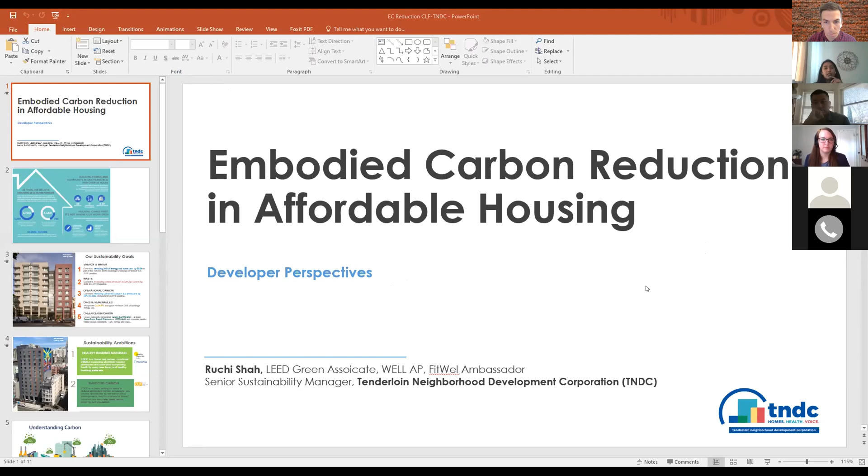So let me quickly share my screen. Does it look good? Yeah, we can see it. Looks good. Is it in full screen mode, or do you need me to switch? Not yet, if you can put it in full screen mode, that'd be great. It's for some reason stuck. Are you able to see the notes, or is my screen frozen? Okay, let me see. I can share the slides from my computer then. That would be great. Sorry about the delay, I think no presentation is fun without some technical challenges. That's right. Okay, can you see the screen now?

Awesome, thank you, Vaslav. So as Vaslav mentioned, I lead sustainability efforts at TNDC, and our main goal is to sort of understand how can we push our efforts in sustainability beyond what we hear, people reducing energy, water, waste. So Vaslav, if you can jump to the next slide.

A little bit before I dive into our perspectives about TNDC - we are an affordable housing owner and developer in San Francisco, and we have 43 buildings. This is a little outdated, the graphic, and 11 more in new construction. When we look at the full portfolio, this means that we have a huge opportunity to reduce carbon, which is sort of our biggest enemy right now as we are facing climate change issues all across.

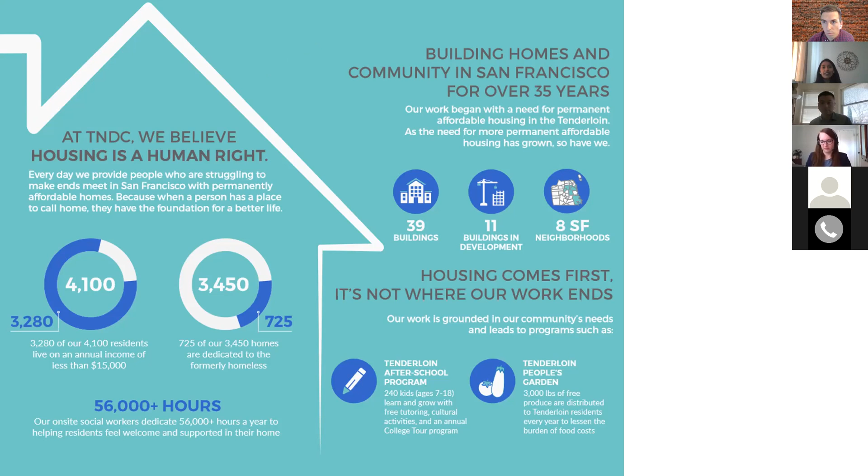So as I mentioned, we, like other developers, have standard goals on energy and water reduction and waste reduction, which directly impacts our triple bottom line and our tenants' bottom line as well. But with the changing environment around us, we really wanted to focus on carbon and adopt a very specific lens on how we can reduce carbon.

So we started with an operational carbon goal, which means reducing carbon emissions from our building operations, meaning gas and electricity usage. Our goal is to reduce scope 1 and scope 2 emissions. We also decided to focus more strategically on on-site renewables, so every new building that we build is evaluated for solar PV.

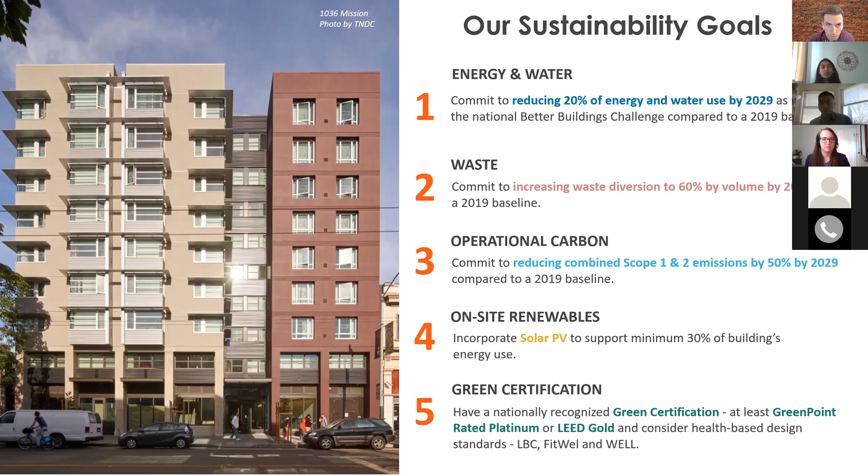And then targeting green certifications, irrespective of whether a funder requires us to do that or not. When we look at LEED, we want to hit gold. When we look at GreenPoint Rated, we want to hit the maximum levels feasible within the constraints of our budget. And on a per-project basis, we are looking at Living Building Challenge, Fitwel, depending on how it fits with the type of project.

Furthermore, we have two ambitions. We do not yet have a formal goal, and we are still researching how to make it a goal, but we really want to reduce the use of toxic chemicals in our buildings. Because if you think about it, the population we are serving already has a lot of health concerns and is vulnerable to climate change impacts. So our goal is to reduce the toxic chemicals used in building materials right from the onset.

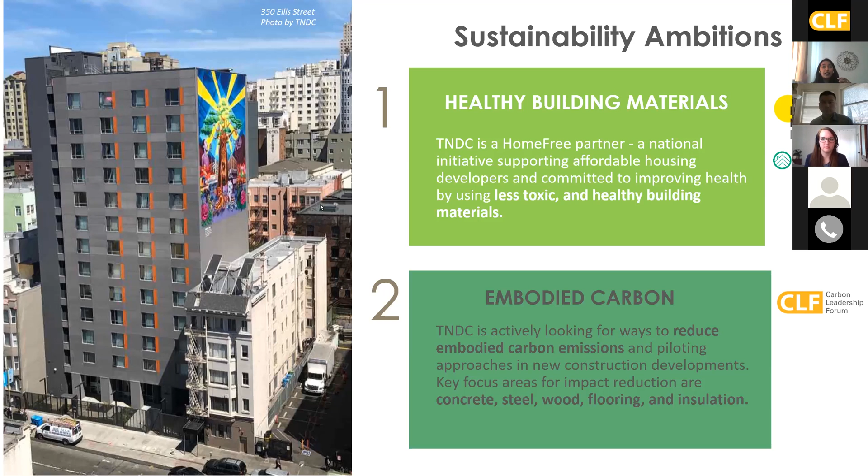The second aspect is tackling embodied carbon, which means reducing carbon again from the onset, from the design and construction phase. So we are looking at a few high-impact areas like concrete, steel, wood, insulation, and flooring. Right now our goal is to just focus on some low-hanging opportunities, and then as we learn more, formalize that into a goal.

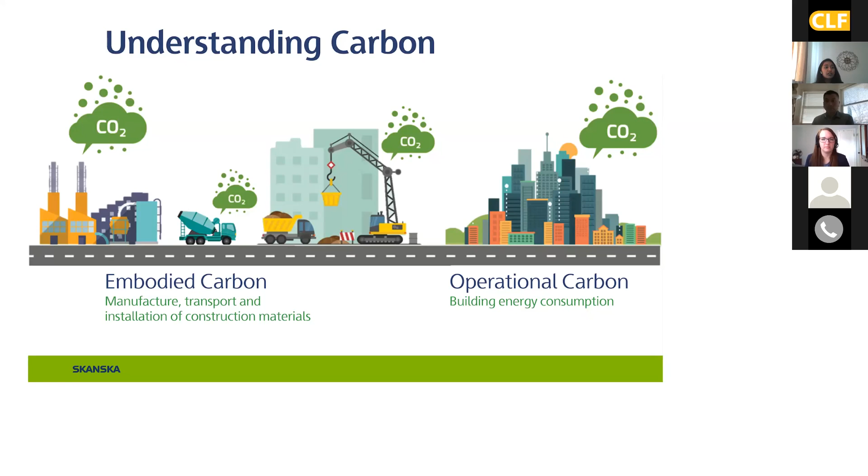Even though we are not covering too much of the basics, just to get on the same page: through all of our energy reduction efforts, we are reducing operational carbon, which is after the building is placed in service. But from an embodied carbon perspective, we are targeting everything that happens before a building is built—working with our teams on figuring out how we can reduce carbon emissions from manufacturing, transportation, procurement, through design and specifications for the materials that go into our buildings. So that's the embodied carbon piece.

As a first step, we decided to work with one of our architects, Mithun, on a project—681 Florida in San Francisco—where, at a very high level, we wanted to understand what are the opportunities for us to reduce embodied carbon. So they did a whole building life cycle analysis using a tool called Tally.

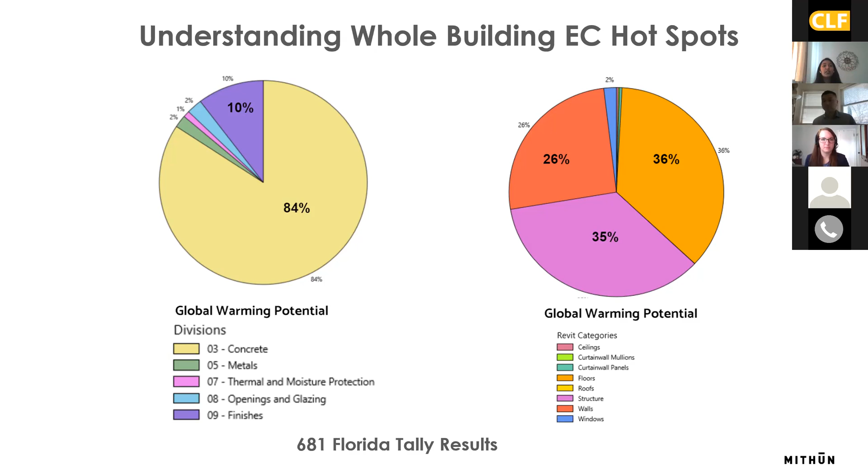It's a few hours of work, but what we learned, which is no surprise now as we are seeing this more and more, is that concrete was our biggest opportunity area. And then a few others are structure, ceilings, finishes, things like that—just needing a perspective that these are the areas we need to focus on. So that was our very first step that we took.

So starting with structure, we decided to work with our structural engineers on that project, as well as all the other projects we have in new construction, to have a basic conversation on how we can reduce the impacts of concrete. When we think about concrete, many things go into making it, cement being the most notorious one in terms of carbon impacts. The manufacturing process is pretty intensive. So we are focusing on how to include more supplementary cementitious materials, meaning less cement and more low-carbon elements like fly ash or slag, which I'm sure my co-panelists, the structural engineers, will talk more about.

As a result of this exercise on the 500 Turk project, where Cahill is our partner, we were able to reduce 20% of the carbon emissions just by strategically changing the concrete design mixes. This was no cost at all to us—of course it was a little bit more time and effort—but this happened because we started the conversation on embodied carbon.

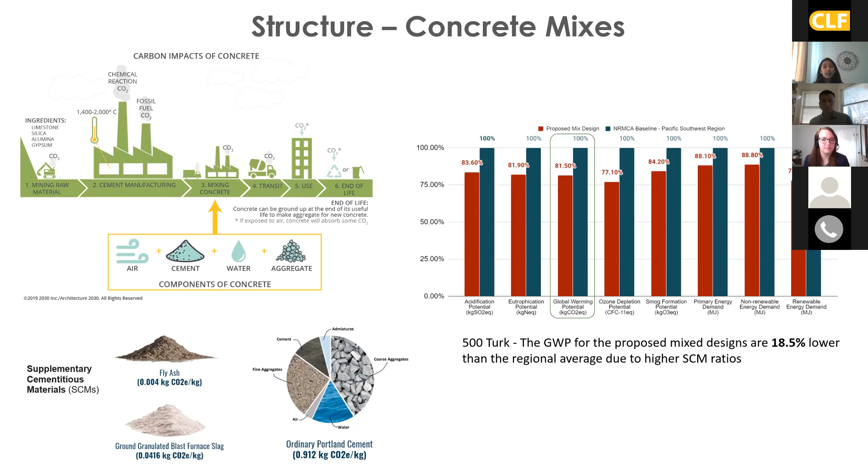The second target area for us is flooring. When we look at square footage, the amount of flooring materials we use in buildings is huge. In the 500 Turk project with Cahill, some common areas initially had carpet specified. So we asked, what's the carpet out there with the lowest embodied carbon impact? We used a free, easy to use tool called EC3, the Embodied Carbon in Construction Calculator.

We found Interface, a very popular brand, has the lowest carbon impact, and our architects had specified that. But the second step we wanted to take is, what if we totally removed the carpet from the space? In this case, we decided to keep some areas as exposed concrete itself, completely eliminating the carbon impacts from the carpet.

Now, I understand this might not be possible in every scenario. Even if you have to use the carpet, I think this tool helps us understand what's the lowest carbon option out there.

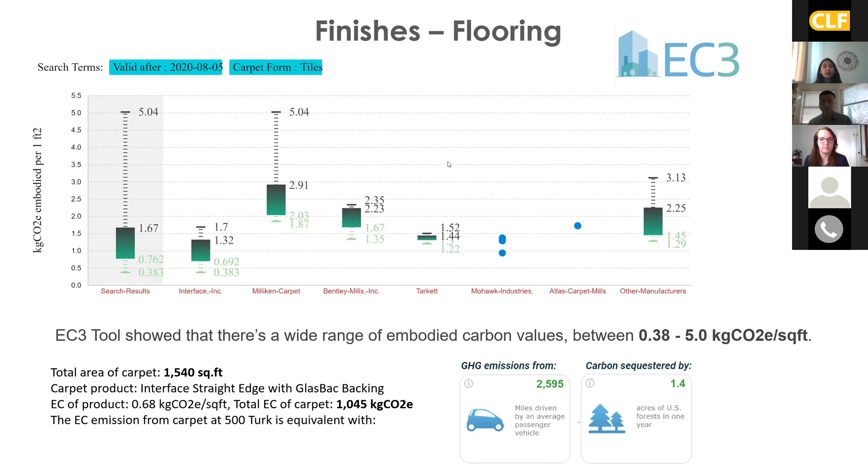The last two examples I want to highlight on how we use this approach: we focused on gypsum, which is used so much in our buildings, to evaluate what are the low carbon options in that same category of products. Generally, we use Georgia Pacific, which has a much higher carbon impact compared to other brands. They are also used in affordable housing, so it's just a matter of picking those brands with a perspective of carbon.

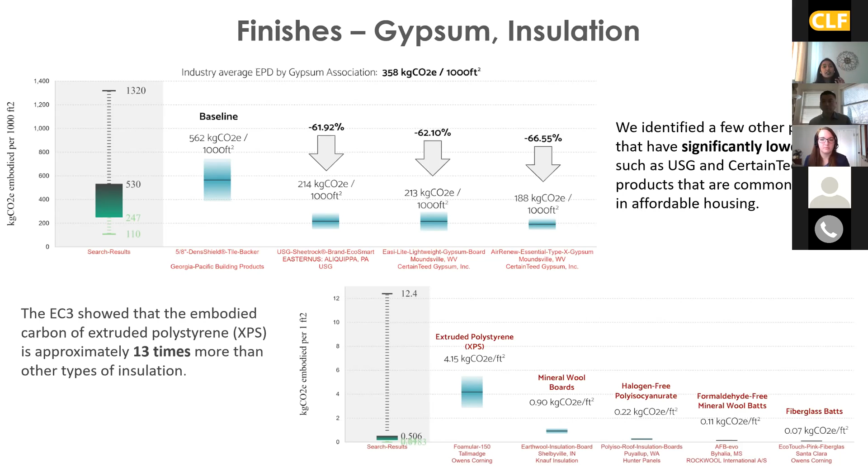The last example, similarly, we approach insulation. We wanted to think about how we can reduce XPS, which is the most notorious in terms of carbon and chemical concerns, and start substituting with mineral wool or fiberglass. It may not happen in all aspects of insulation in your building, but at least we can start focusing on some areas where we can make this incremental change.

So to wrap up, and I know my panelists will share more details, collectively how can we take action? I think the first step is educating the team about the concept of embodied carbon, which still feels new in our sector even though a lot of resources are coming out. Engage every team on every project, from the architect to the contractors and all stakeholders, because everyone needs to understand that an owner or developer cares about these things. Otherwise, even if they have good ideas, it might not come to the table because they aren't aware of it.

The second approach we are taking is to start thinking about whole building life cycle analysis. It's not a very expensive exercise if you do a broad brush version. We are targeting LEED and Living Building Challenge credits, even though we are not targeting full certification, just those aspects to understand where and how we start.

The other element I've found very helpful is starting to put language around embodied carbon into design guidelines, RFPs, and material specs. Even though we don't have all the data, I can't say we need embodied carbon at a certain point, but I want us to think about embodied carbon.

The last is, as you go through the steps, target low-hanging, no-cost opportunities, which is more about substitution. We are not implementing really innovative materials at this point, just substituting our choices for low carbon options. There are lots of resources out there like the Carbon Smart Materials Palette and other tools which we can share later.

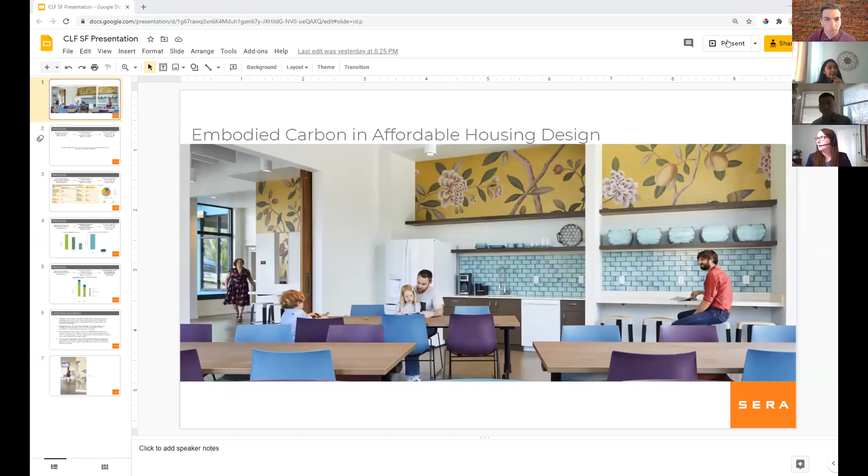All right, I'm Beth Lavelle. I'm an architect at SERA. We're a firm of about 180 folks based out of Portland, and we have a branch office in Oakland.

I'm going to talk about, from an architect's perspective, our process and how we're starting to untangle this challenge of embodied carbon, and specifically what that looks like in affordable housing.

So our process, how this embodied carbon analysis fits into our overall design process, I'm going to walk through that first. We start very early on with just an estimate of embodied carbon.

We've built a spreadsheet tool, which I'll show you a peek of in a minute, but it's before we even have a building design. It helps us, similar to what Ruchi was showing, find where are the biggest impact categories, what should we be paying attention to the most, where's the low-hanging fruit. We built tools to help us do that before we even have a building on paper.

Next, we go to a comparative analysis of major building components to help support decision-making with our client and our contractor team. This is looking at big moves, big decisions that need to be made early on. What structural system are we using? Things that you can't really backtrack out of after you've made that decision.

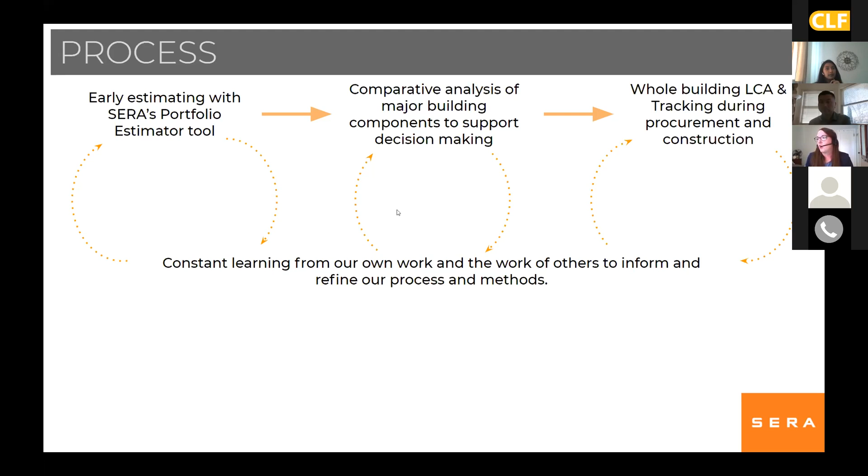So this is a peek of our early carbon estimator spreadsheet tool. We built this really as a way to analyze our entire portfolio without having to do full whole building LCAs, which are really time consuming. This is a really simple spreadsheet tool, and we're using this early on in projects, before we have a building design.

It helps give us these kind of big categories - what are we looking at that has the biggest impact, and where can we grab that low-hanging fruit early on in the project?

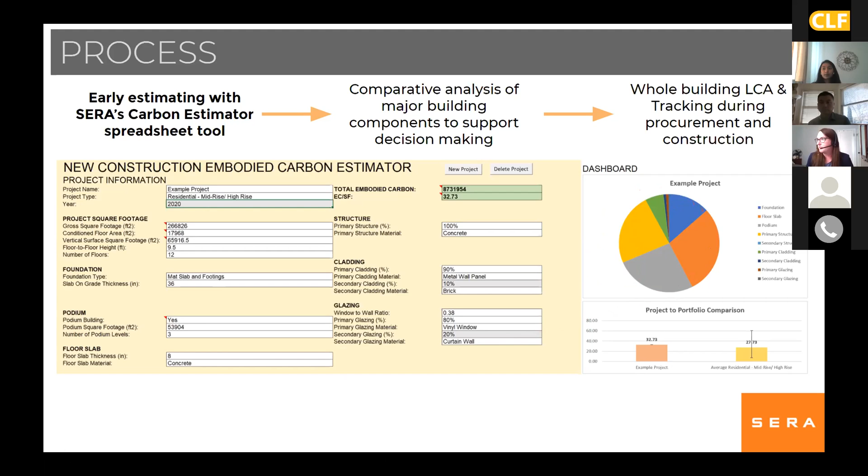Then we look at comparative analysis. These are a couple of examples of what I'm talking about. We're pulling out specific parts of the building to analyze just small little pieces. So let's look at concrete versus steel in our structural cores, let's look at timber versus steel columns, and help make those decisions very early on in the project without having to do the time-consuming part of a full building LCA.

And this approach has been really effective for us to get that in front of our clients and the decision makers really quickly, so that they have the information that they need, along with cost and all the other drivers. We're getting this up front as soon as we can.

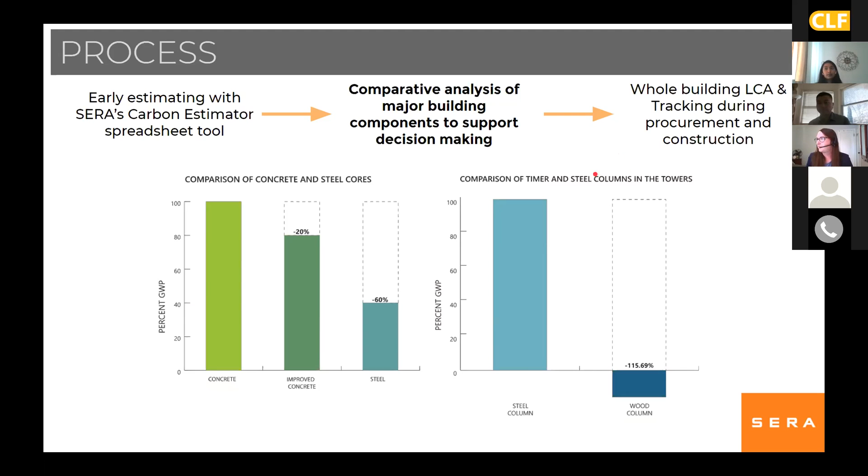And then a whole building LCA, as Ruchi kind of set me up great for this. This is when we're looking at the full design, everything that's going in it, with some exclusions for interiors and things that are a bit complicated to model and to analyze.

But this is a comparison of a recent project. We're looking at a baseline concrete structure scenario versus a heavy timber scenario. So once we get to a point in our design process and we have a full 3D model that we can work with, we're running that through Tally and EC3 and continuing to track that throughout the development of the project.

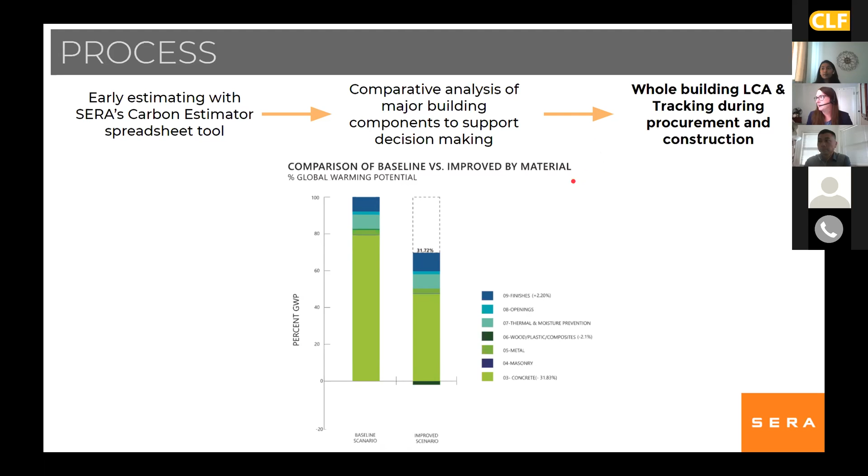So a couple of lessons learned as we've been digging into this really deeply over the past year or so. Affordable housing clients in particular have really good alignment with our own sustainability goals. Those are not givens for other types of clients.

Particularly, I have a lot of experience in market rate, and this is not a conversation that a lot of our market rate developers are having yet. But affordable housing clients really care about their impact on the environment and how they're affecting the community and the world, really. So it's easier to have those conversations - we kind of have an open door from the beginning.

In affordable housing, budgets are tight. So we've seen that this can pose some challenges with mass timber as an emerging structural system.

And in particular, when we're doing mass timber, it can be difficult to get FSC certified wood. We know that FSC has the most confidence in the data of the forest management practices and has the most reliable information about the impact of that wood. It can be hard to get on affordable housing projects.

Since budgets are very tight, space is really precious. One thing I'm struggling with now on my current project that's mass timber is that timber takes up a lot of floor area. Those columns are really big. We're trying to squeeze down every inch of occupiable space that we can get for living space. So sometimes it can make structural systems like steel look really attractive with a much smaller footprint.

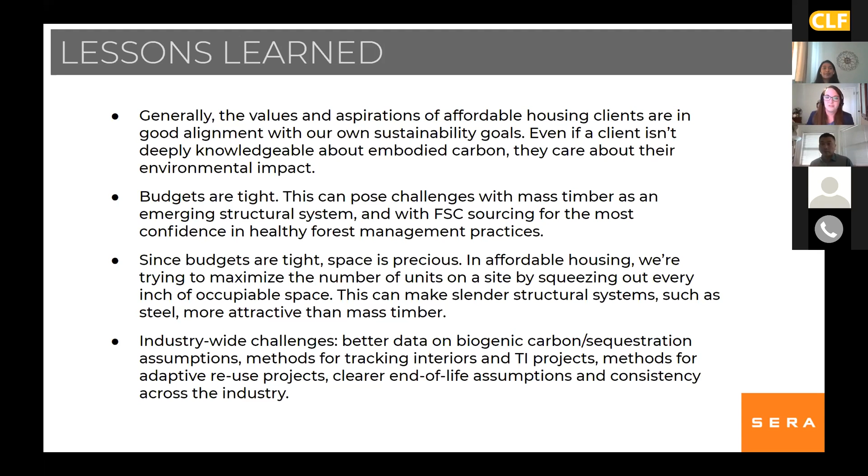Evolving methods for tracking interiors and TI projects is kind of an industry-wide issue. Methods for adaptive reuse projects, and then clear end-of-life assumptions and consistency across the industry. We're struggling with this. Everybody's struggling with it. It's going to continue to evolve, and we just have to work through imperfect methods and data right now. So that is what I have for you.

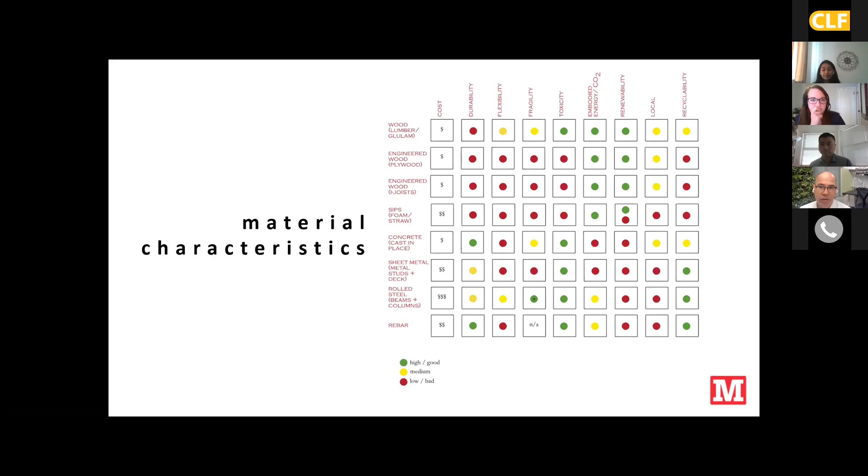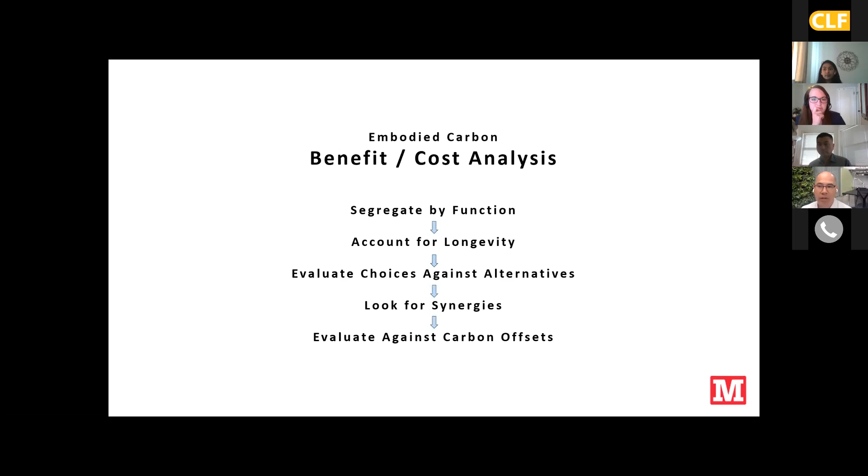And so it sets up a more nuanced understanding of what's going on with materials. When thinking about embodied carbon, one thing I like to do is understand that all materials have to do a job, and think of all the materials competing with each other. So I developed this way of thinking about it, where we take materials and segregate by function or the job. We think about longevity—how long is that material going to exist—look at other alternatives, look for synergies, and then evaluate the material and cost against carbon offsets. Holistically, all the materials have a cost and a benefit.

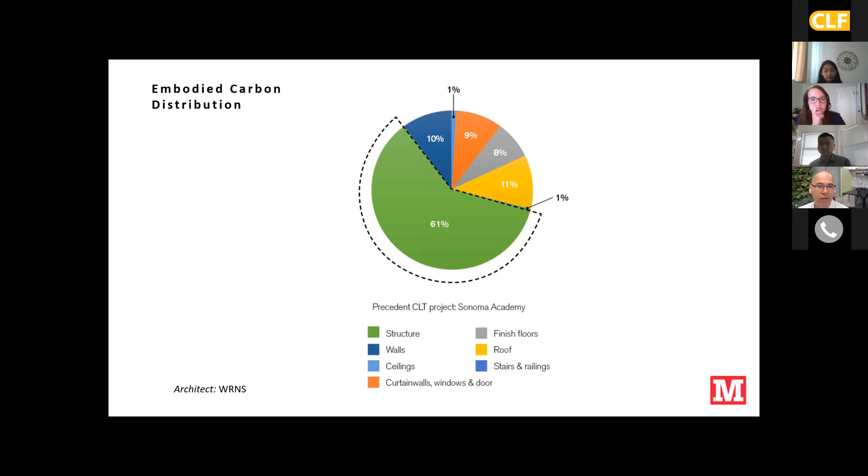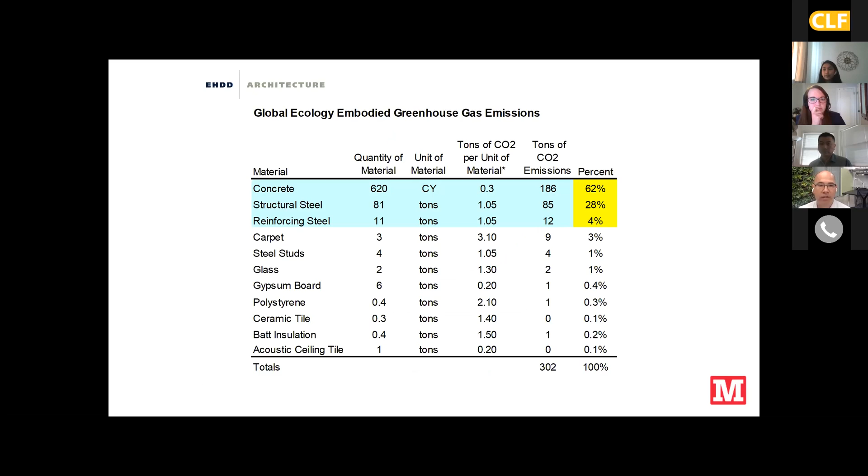We've seen a couple of these. This graphic is from WRNS on a project, Sonoma Academy, looking at the impact of structures on the overall carbon accounting. Here we've got over 60% in the structure. This is another one of these by EHDD. The structural materials here are 90% on one of their projects. So the takeaway is that the structure is a big actor in terms of the carbon footprint of the building.

This is a really lovely graphic by WRNS for the Kelsey project. Here they're looking at all the different systems in a building, taking a holistic view and looking at how long these elements last. Longevity, I think, is a super important factor in this—you see things like the foundation, the core, and the structure are quite long-lived relative to facades, mechanical systems, and contents.

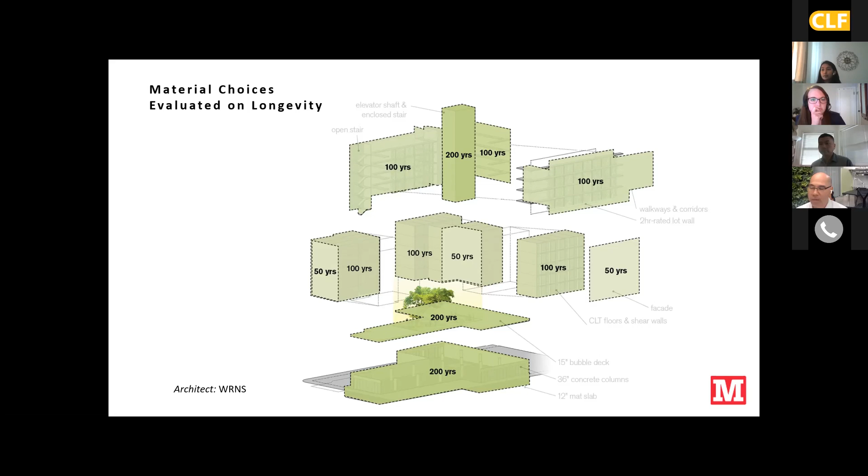Now I'm going to shift gears and get into, as was spoken of earlier, the concrete story and the carbon impact of concrete. First, it's important to acknowledge that the biggest driver in the carbon footprint of structures is concrete, and that includes even wood structures. The biggest driver in concrete is cement. So we look at ways of replacing cement.

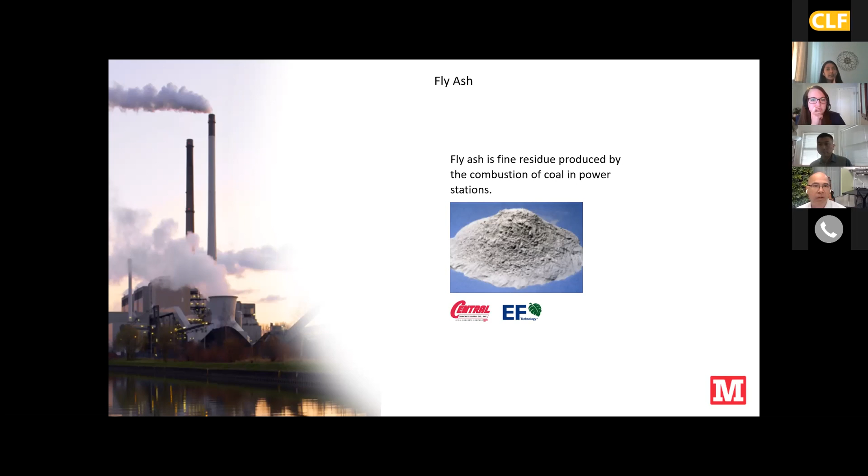The basic tools out there are fly ash, which can do some replacement. The bigger, more effective actor is slag—this is a waste product from steel making. When you put it all together, you can look at traditional concrete as a baseline. A cubic yard of concrete may have about 400 pounds of carbon released into the atmosphere.

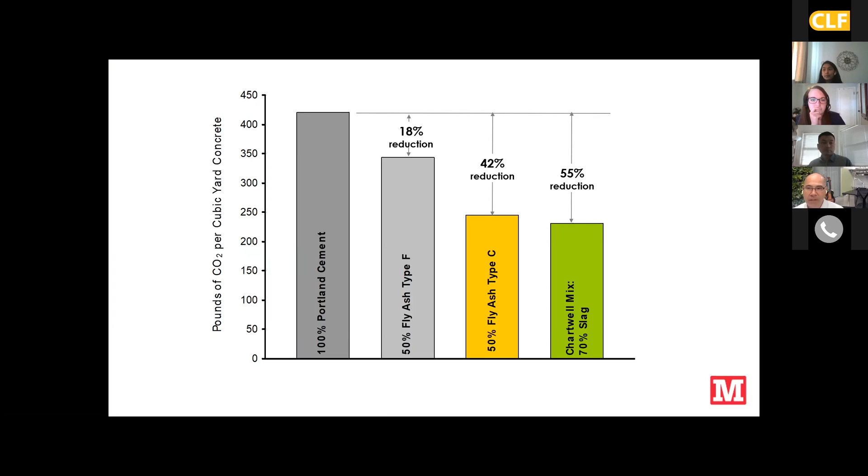You add a bunch of fly ash to it, you can reduce it about 20%. You add a bunch of slag, you can reduce it by about half. So it's really important that in our specifications, we specify upper bound limits on cement. We go right at it. We don't mess around with cement replacement or percentages. We just say these are the limits you have to hit in the contract documents. So let me give you examples of how we would do that.

This is from the San Francisco Public Utilities headquarters. This is an all-concrete building. One of the biggest factors here is that the strength of concrete continues to increase over time. And when we typically specify concrete, we think about it in terms of 28 days. This graph is just showing strength increase over time.

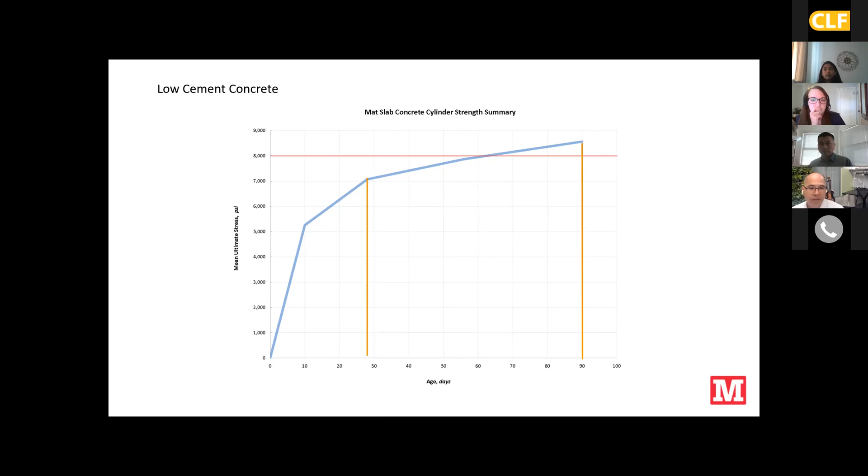So for the foundation of this building, we actually specified 90 days. We let it just get stronger and stronger and stronger. By doing that, we looked at the job that the foundation needed to do. When we figured out when the foundation needed to do its job, we figured out we could wait a long, long time. And then we were able to really reduce the amount of cement in that concrete because we could wait so long.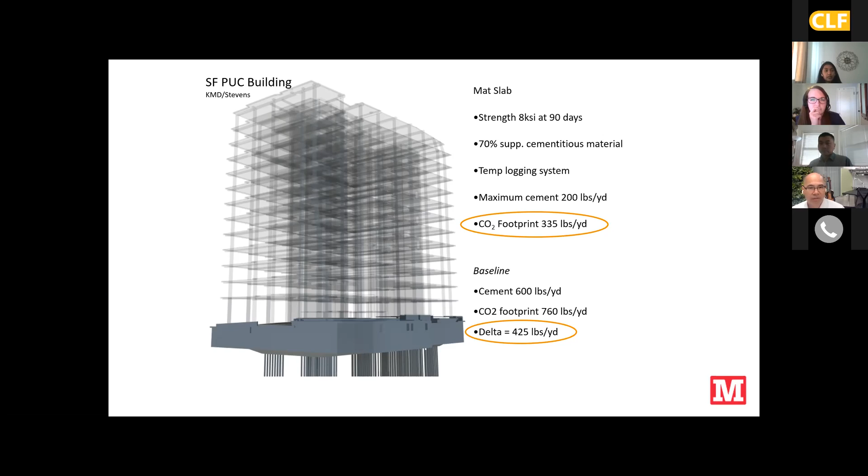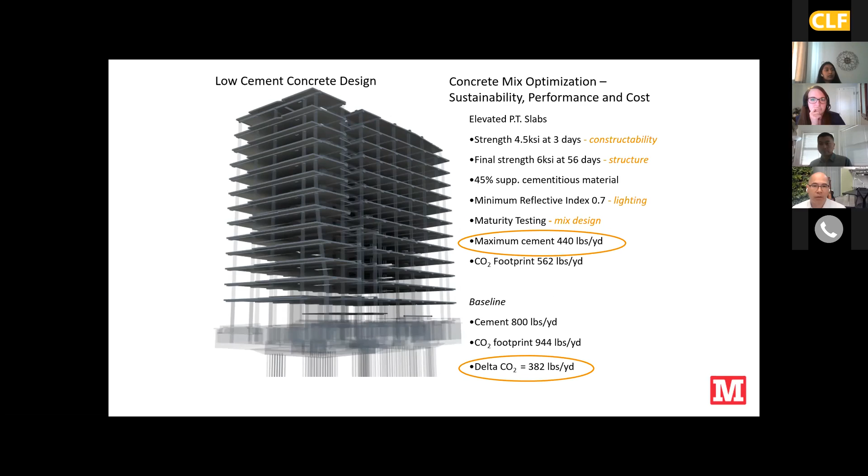So this is an example of tailoring a mix for the job that needed to be done. Now in the elevated slabs, in order to hit schedule, you had to pull the forms after 3 days. So the mix had to be super hot, with much greater amounts of cement in it in order to meet that schedule.

What we did on this project, though, is we started in partnership with Central Concrete, treating them as a design partner, and we looked at every element of the building, whether it was foundation, shear walls, or flat slabs, and figured out what job needed to be done and what the cost constraints and, more importantly, constructability constraints were on that. Then, in partnership, we reduced the amount of cement to the extent that was practical.

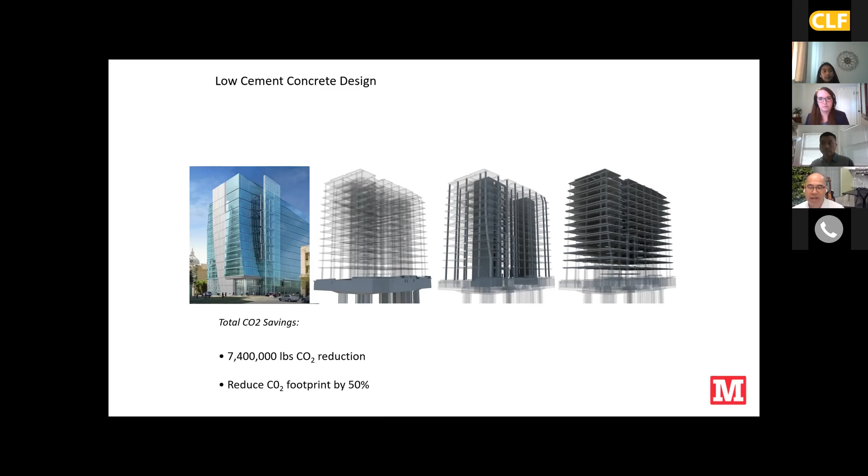And I want to emphasize practical, because in this case we were able to reduce the carbon footprint of the entire building by 50%. But we did a lot of moves to get it done, and they had to be done again in partnership with the supplier. So the supplier is like the expert that's available to design teams.

So finally, listing in order of importance: number one thing you could do is get in there and replace Portland cement with slag. Again, slag is reactive, so we'll have mixes that commonly go up to 70%. The next is to think about reshoring time, like how long you can let concrete wait. That will allow you to develop leaner mixes.

The other thing that's super exciting, we're hoping this becomes available in the market, is carbon sequestering aggregate. There's a couple folks out there doing it, but locally Blue Planet is a firm, and they're essentially making artificial limestone and then using that to sequester carbon and stick that in concrete.

There's also some strategies to displace concrete, like in this case, Bubble Deck is a product where you purposely build voids into the concrete. And then next, last is carbon cure. This is an industrial process that injects carbon into the uncured mix and makes the concrete stronger by absorbing carbon.

And then finally, this notion of concrete maturity monitoring. That's where you put temperature sensors in slabs. This allows the mix designers to be much leaner in the amount of cement, because if it gets cold and the concrete starts going to sleep, they can rush out and put blankets on the slab and keep the mix from going off.

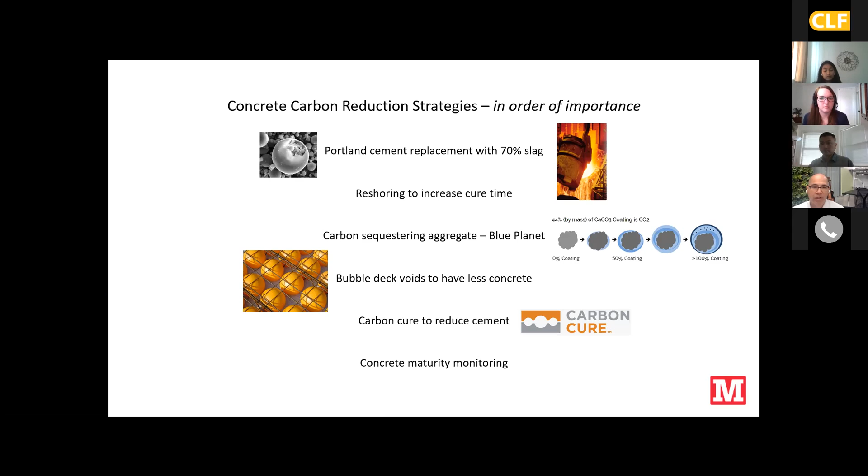So all of these are moves that you could plan with your concrete specifier to get the super aggressive low cement concrete. Now I'm going to pivot and talk about mass timber and some of the timber strategies that are really appealing right now.

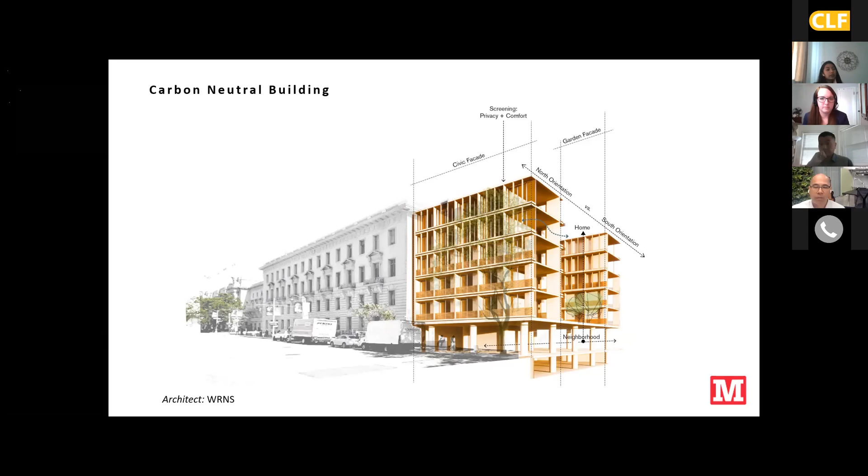This is the Kelsey Center being designed by WRNS and Santos Prescott. It is a project that has a goal of very low carbon footprint. We're looking at mass timber in the floors and in the walls right now.

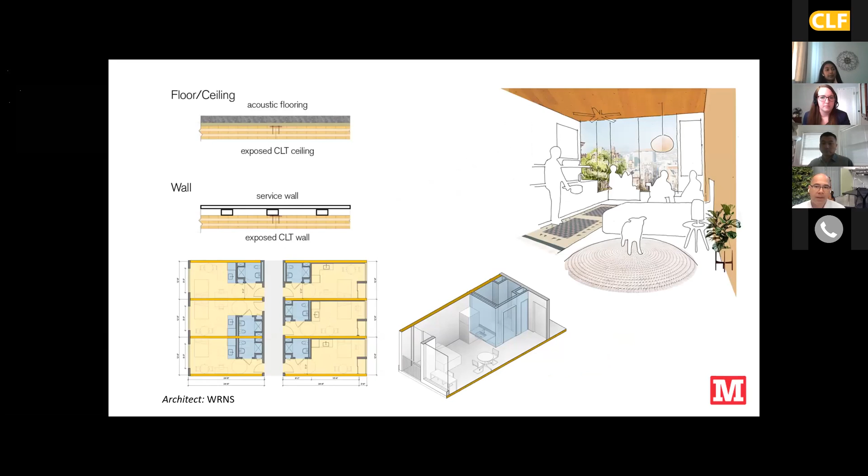Some of the strategies that I think are super exciting are being able to take mass timber. There's various forms - they could be composite or non-composite, but the ones that are really exciting are the more sophisticated shapes that are coming out of Europe, and these are not in the U.S. market yet. But what's really going on is we're in the very, very early days of mass timber systems.

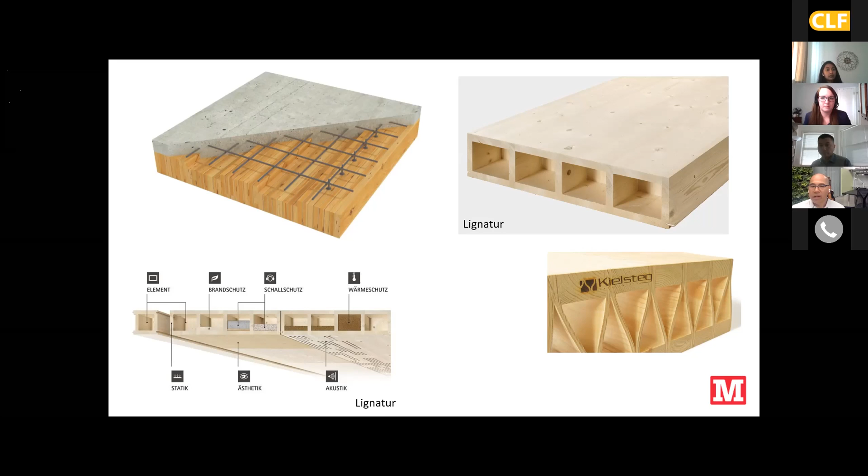They're fundamentally not that efficient—think of an I-joist. They're not maximizing where the material is in the system. So there are more sophisticated ways of getting the material distributed to get systems that are stiffer and stronger but use less wood.

These are really exciting developments coming down the pipeline. The other consideration is that mass timber is not driven by strength or deflection, but by vibration. So with any new material, there are new things to worry about.

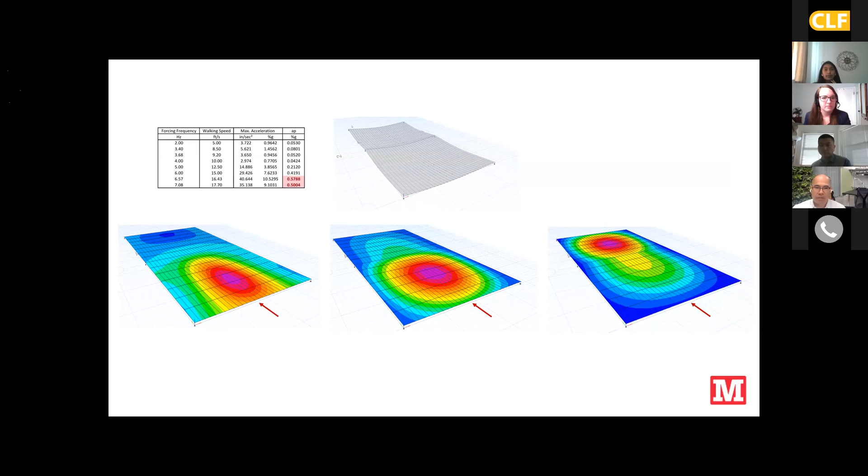Luckily, a lot of the suppliers now, when they give their load tables, will also give the loads controlled for vibration. But when you have complex configurations, you actually have to do fundamental modeling to understand accelerations and velocities and do sophisticated studies.

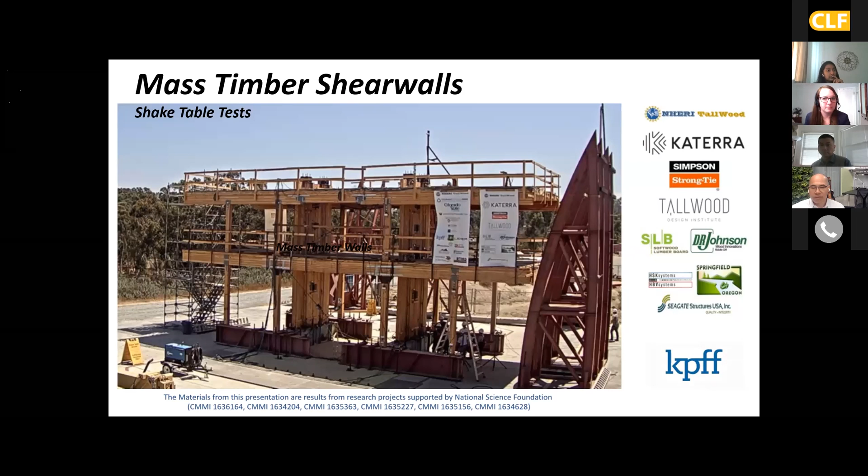The last thing I want to talk about is some really great innovations coming for mass timber shear walls. In a traditional shear wall, you have hold-downs at the ends of the buildings. What folks have been doing is taking those hold-downs and locating them inside the timber wall.

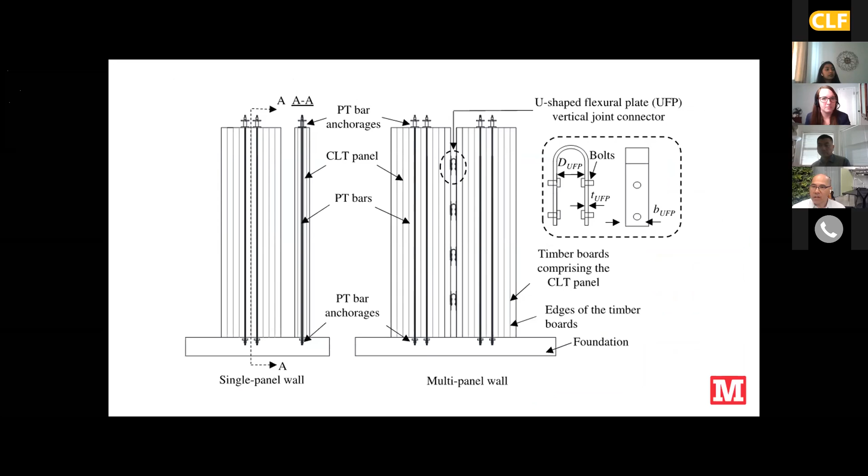So you can get walls to rock and recenter. Rocking walls and recentering walls have been around for about 10 years—we've done them in steel and concrete. The exciting part is applying that technology to mass timber. The basic notion is you have a rigid block with post-tensioning on it; an earthquake comes, and then the building realigns afterward. There are different ways to dissipate energy and get self-centering.

This strategy of rocking and realigning is what we employed at Casa Adelante, the multi-unit housing project mentioned in my bio. We were able to get a building that achieved a gold rating from the U.S. Resilience Council by employing some of these rocking technologies. This was built by Cahill, and we were able to do this at zero added cost against the baseline structures.

Again, I think we're in the very early days of mass timber and lower carbon buildings.

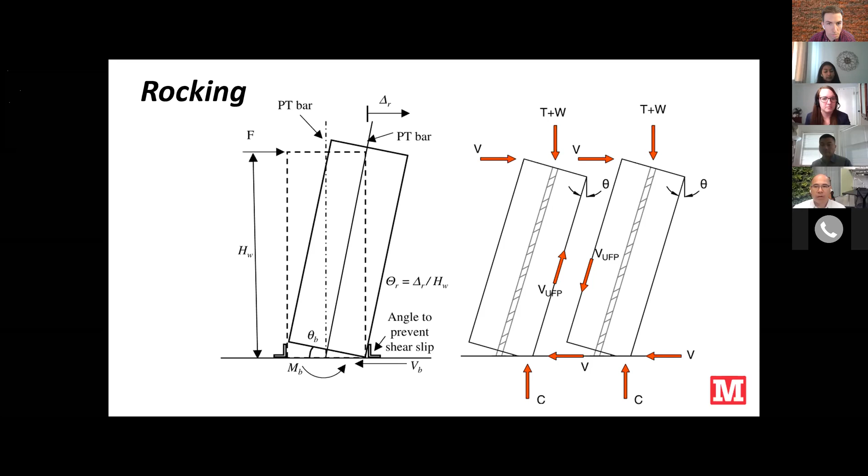My last slide—there's a company out there, BamCore, that's doing structural bamboo walls, and we hope these folks can take off. Right now this is mostly targeted towards single family residential work. In terms of a material that's really good for the planet, bamboo is even much better than traditional timber because it's rapidly renewable—in a single season, you can replace the bamboo.

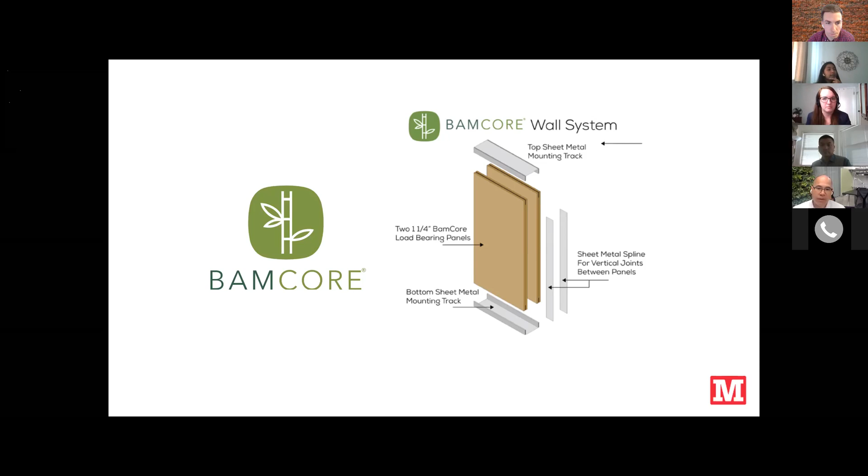So that is it for me. I'm going to turn it over to the next speaker.

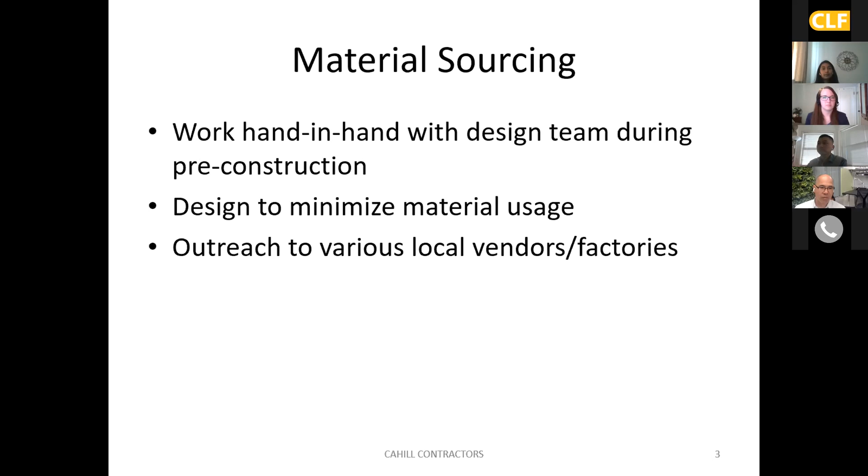All right, let's see, next slide.

Procurement - regarding procurement, again, we want to do our best to minimize material usage. There's been a lot of talk about modular, which is a pretty intense way to do it where you build the majority of the building offsite, finish it, and then bring it to the site and drop it in. But I don't think we should look at it as all or nothing, going all extreme modular. I always like to think there's somewhere in the middle, because anything we do will help.

That's why I think the trend I've been seeing the last 10 years is even prefabrication of components - for example, wood framing and plumbing. With wood framing, you see panelized wall systems and floors still built off-site. I was talking to our framing contractor last week, and he mentioned the panelized way is really a better way to minimize waste, because they can control things a lot better in the factory or fabrication versus buying in bulk from a lumber yard where they deliver all standard sizes and we do a lot of cutting. That's how it was done, but people are recognizing there's a much more efficient way to do that.

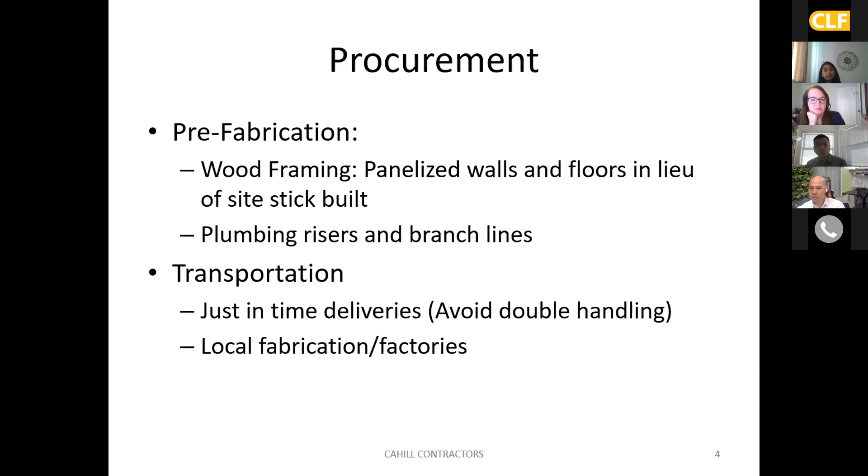And again, I mentioned local fabrication and factories - if those opportunities are there, we definitely should explore that. All right, next one, and then planning.

Pre-construction detailing, I can't overemphasize that because it's a partnership. The more we get feedback, we can incorporate those details, versus maybe the design team doesn't get that feedback. They do their best for what they feel can achieve for the job, but in reality there might not be those selections or details that hinder the process and may not make it to reality. So more focus on pre-construction as a partnership. We as a contractor are the last person to install and make it happen, so we really need to be part of it up front to help with the process.

Secondly, BIM, building information modeling, has been around, but I'm just seeing trends. A lot of it on the housing side, MEPs are the big one people focus on, because hospitals, medical facilities, and factories have been doing this since there's a lot more MEP. But now we're seeing other trades, especially structure like concrete subcontractors, modeling it also to be as efficient as possible, build the forms they need, minimize waste. In the old days they'd just bring everything in, do quantities, and just throw away waste instead of building forms as needed. So I'm seeing that trend where other trades are picking up and utilizing modeling.

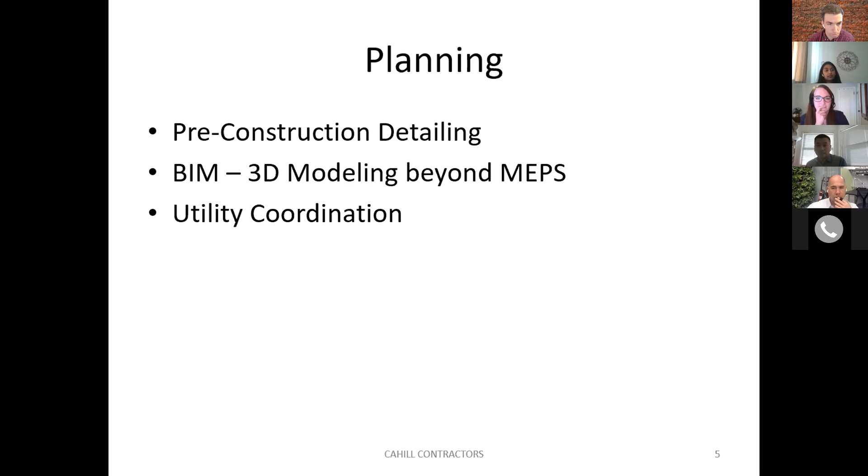So I think I went over my time frame, but I'll turn it back over.